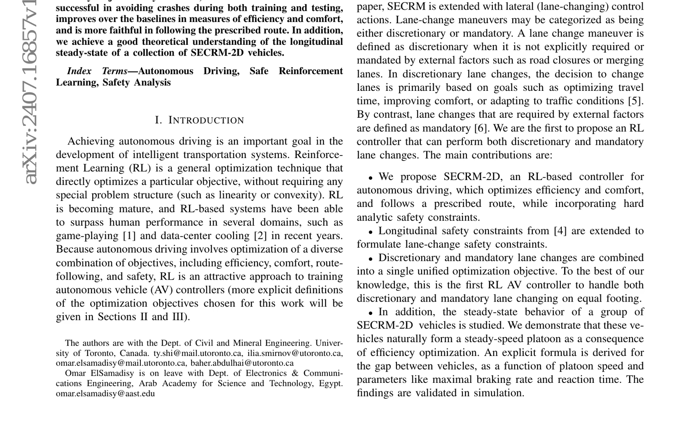distance, speed, and acceleration. The action space consists of a two-tuple, alpha, L, where alpha is an acceleration action and L is a lane change action. The acceleration action is continuous and subject to state-wise constraints, while the lane change action is discrete and subject to constraints that prevent unsafe changes.

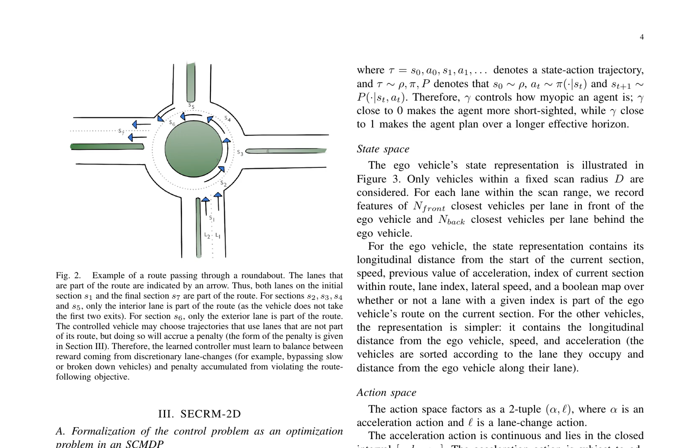The reward function is a weighted sum of four terms: efficiency, comfort, route following, and safety. The efficiency term penalizes the difference between the current speed and the target speed, which is determined by the safety constraints and the speed limit. Comfort is measured as the square of the jerk of the ego vehicle, with a penalty applied for higher jerk values. Route following is enforced through a cost function that discourages the use of lanes not part of the route.

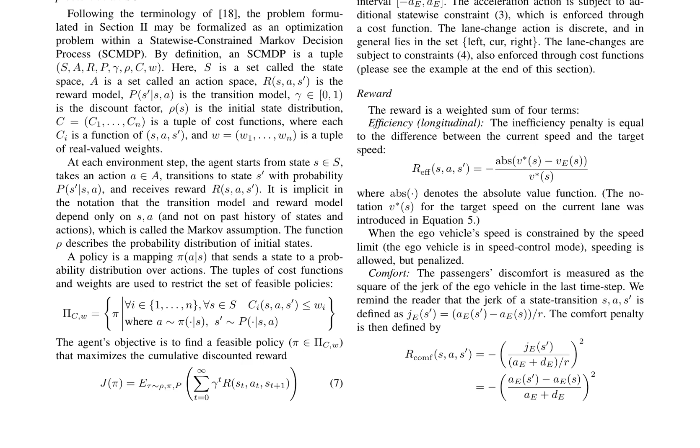Safety constraints are also enforced through cost functions, ensuring that the vehicle maintains a safe gap and adheres to the speed limit. The objective of the agent is to find a feasible policy that maximizes the cumulative discounted reward, which is defined as the sum of the rewards over an infinite time horizon, discounted by a factor of gamma at each time step. This setup allows the agent to balance between improving efficiency through discretionary lane changes and minimizing the risk of missing its route, depending on the value of gamma.

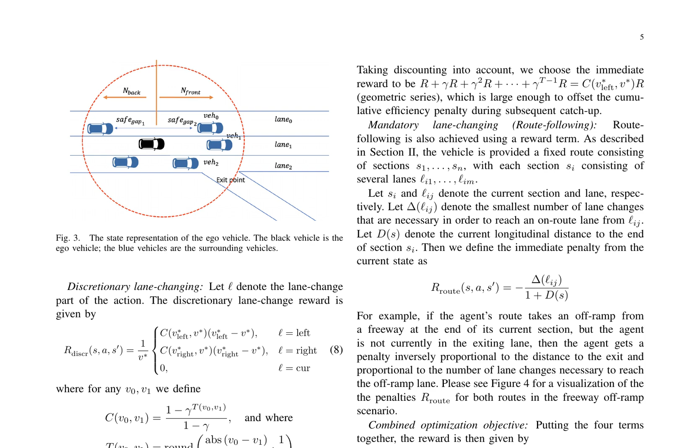The proposed framework for autonomous vehicles aims to optimize both discretionary and mandatory lane changes by balancing two aspects: switching to a lane with a higher target speed and following the intended route. The deep deterministic policy gradient algorithm is utilized for training, which is suitable for continuous action spaces. The algorithm updates both the critic and actor networks to maximize the expected cumulative discounted reward.

The hybrid learning approach considers the current traffic environment to calculate the maximal safe target speed, deciding on longitudinal acceleration and lateral decisions. The safety-aware autonomous vehicle control system is developed by enforcing safety through action constraints rather than a safety term in the reward function.

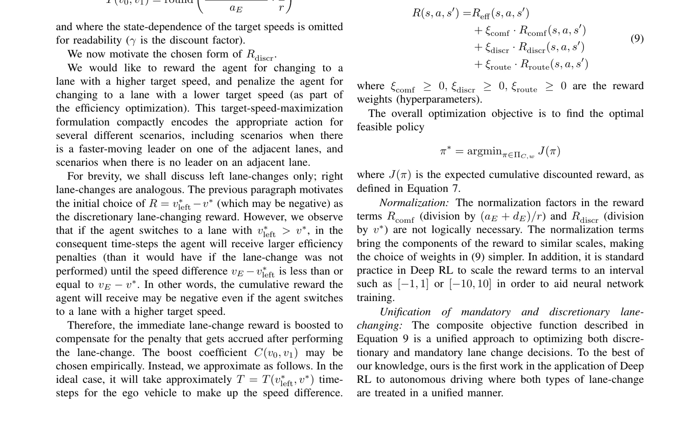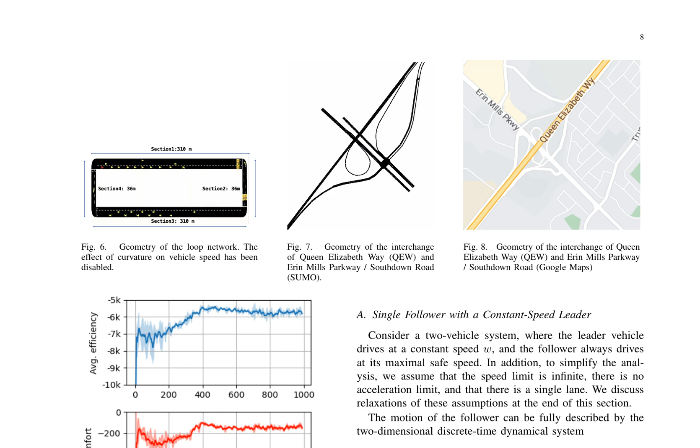The system is trained using DDPG in two environments: a simple loop network and a network based on a real-world freeway. The loop network focuses on efficiency, comfort, and discretionary lane changing, while the QEW network evaluates route-following tasks alongside efficiency and comfort. Uncontrolled vehicles are modeled using the Krauss car-following model and the SL2015 lane change model. The training configuration, including parameters like discount factor, simulation time step, and learning rates, is detailed.

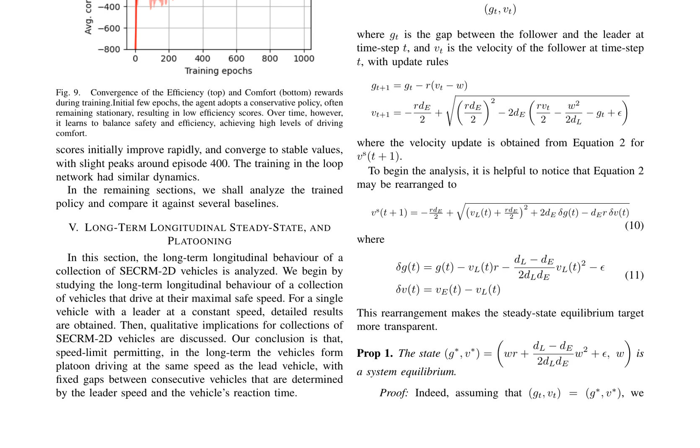The convergence of efficiency and comfort rewards during training is demonstrated, indicating the system learns to balance safety and efficiency. The long-term longitudinal behavior of a collection of vehicles is analyzed, showing the formation of platoons at the same speed as the lead vehicle. The framework's ability to optimize lane changes and ensure safety is showcased through the use of realistic traffic scenarios in the SUMO simulator.

The stability of the equilibrium point, G*, V*, for the system is proven to be asymptotically stable through Jacobian matrix analysis, where eigenvalues have norm less than 1 when W greater than 0, ensuring stability. In the case where W equals 0, complex eigenvalues indicate instability.

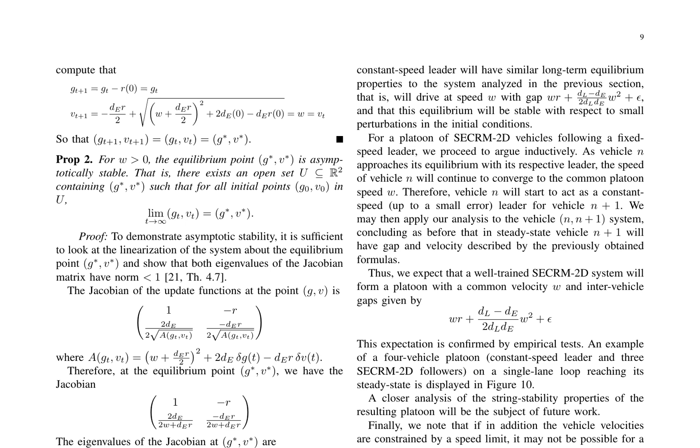The removal of simplifying assumptions necessitates an initial speedup period or a speed limit to ensure the follower can catch up with the leader. This has qualitative implications for SECRM-2D platoon formation, expecting a well-trained model to form a platoon with a common velocity and intervehicle gaps described by previously obtained formulas, as confirmed by empirical tests in Figure 10. However, if speed limits are applied, it may not be possible for a follower to catch up, leading to the formation of multiple platoons.

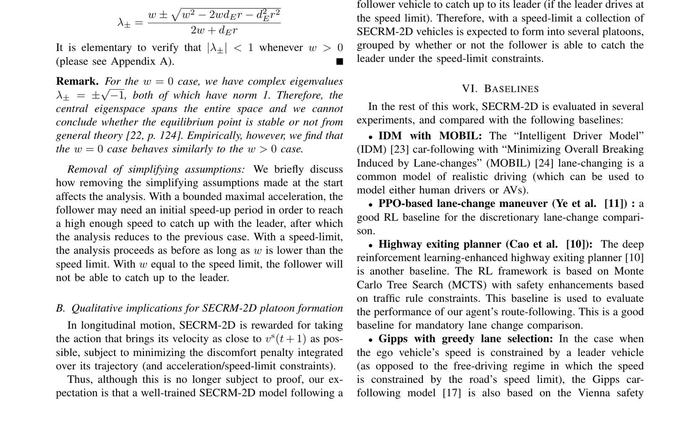The SECRM-2D model is introduced to improve safety in autonomous driving by incorporating hard analytic safety constraints on acceleration and lane change actions. The model is evaluated in 3 scenarios: bypassing, emergency braking, and merging. In the bypassing scenario, SECRM-2D generalizes to unseen configurations, achieving 0% crash rate and outperforming baselines in efficiency and comfort.

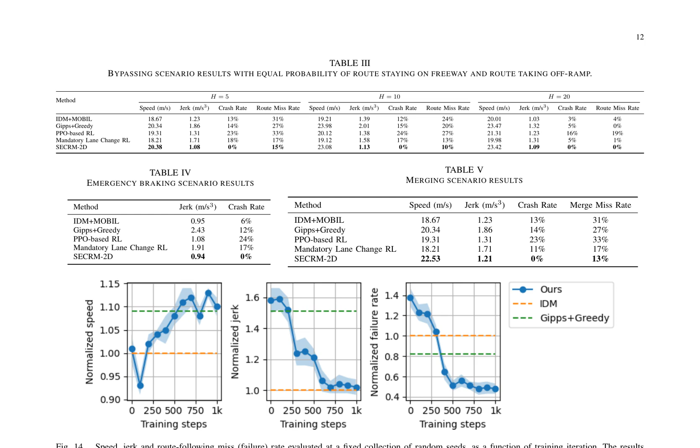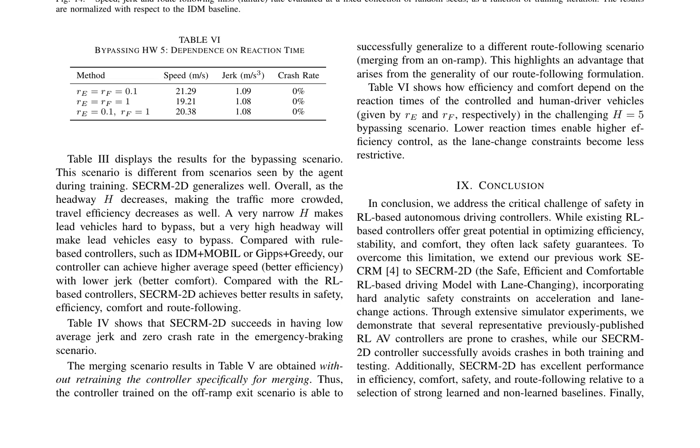In emergency braking, SECRM-2D also achieves a 0% crash rate, emphasizing its safety. The merging scenario demonstrates the model's ability to generalize to different route-following scenarios without retraining. The results highlight the advantages of SECRM-2D over existing RL-based controllers, particularly in safety, efficiency, comfort, and route following. The model's performance is attributed to its ability to balance safety, efficiency, and comfort, making it a promising approach for autonomous driving.

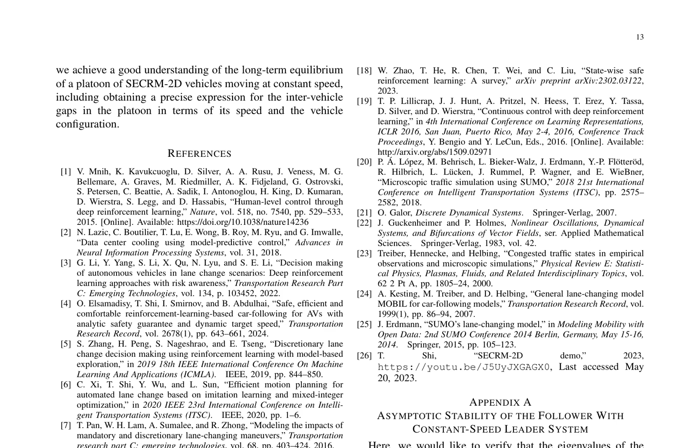In the context of a platoon of SECRM-2D vehicles moving at a constant speed, the long-term equilibrium is examined. The inter-vehicle gaps are expressed precisely in terms of speed and vehicle configuration. This analysis serves as a foundation for understanding the stability of the follower with a constant speed leader system. The stability analysis reveals that the eigenvalues of the Jacobian matrix at the equilibrium point satisfy |lambda±| less than 1 whenever W greater than 0, which is crucial for ensuring safe and efficient traffic flow.

The research team's expertise in reinforcement learning and intelligent transportation systems, including car-following models and lane-changing strategies, significantly contributes to this study. The findings emphasize the importance of integrating artificial intelligence and transportation engineering principles to improve urban freeway operations. By applying these principles, enhanced traffic flow and reduced congestion can be achieved. The research team's work highlights the significance of considering both vehicle speed and configuration in maintaining optimal inter-vehicle gaps, thereby promoting smoother traffic flow and reducing the risk of accidents.

This study's outcomes underscore the importance of interdisciplinary collaboration between AI researchers and transportation engineers. It demonstrates how insights from reinforcement learning can be applied to real-world problems, such as optimizing traffic flow on urban freeways. As cities continue to grow and traffic congestion becomes increasingly problematic, the integration of AI and transportation engineering may offer valuable solutions to enhance safety and efficiency in urban transportation systems.